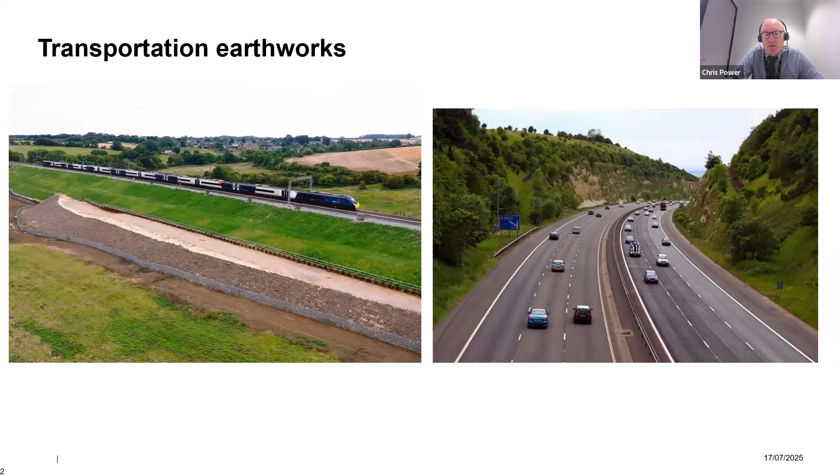And in our part of the world, some of the portfolios of earthworks that we're dealing with are really quite sizable. So I've been mostly working with Network Rail and National Highways and its predecessors for many, many years. If we look at the railway network of Great Britain that Network Rail has responsibility for, it's a network that's nearly 10,000 miles in length. And by the definition of earthworks that Network Rail uses, there's nearly 190,000 earthworks that exist around that network. And I'm sure you can imagine the size of the network and the coverage that it has means that it encompasses a large number of different geological material types.

For National Highways, who have responsibility for the strategic road network of England, a smaller network, 4,400 miles, but a decent number of geotechnical assets that need to be dealt with as well. So nearly 50,000 geotechnical assets that National Highways has responsibility for.

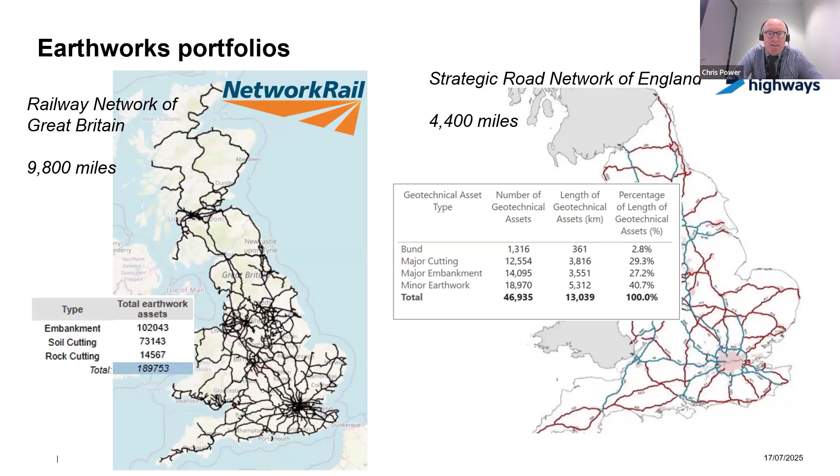And one of the issues that network owners have is that, depending on which owner you are, these earthworks are quite aged. They've been around for quite a considerable number of years.

So this chart here, from a presentation that Tim Spink did in 2019, shows the percentage of network constructed in a given year for both the rail network that Network Rail has and the motorway network of National Highways, and going into HS1 for the link down to the Channel Tunnel. So the main body of earthworks construction on the rail network was in the 1820s to 1860s. So they're pushing 200 years old, some of these earthworks now on the rail network.

Obviously, the motorway network is somewhat younger, built from the late 50s with a main drive through to the 70s and another peak in the 1990s. But even that is starting to show its age now. We're starting to look at things that are pushing 70 years old in some parts of the network.

And the pictures around the outside here show one of the challenges that the age of these networks brings us: the change in the construction techniques applied when they were built. So on the left-hand side, you can see the relatively rudimentary way that earthworks were constructed by the Victorians. Lots of animal and human power to move things around. Embankments were just materials tipped off the edge and self-compacting, or compacted by the weight of horses alone, often.

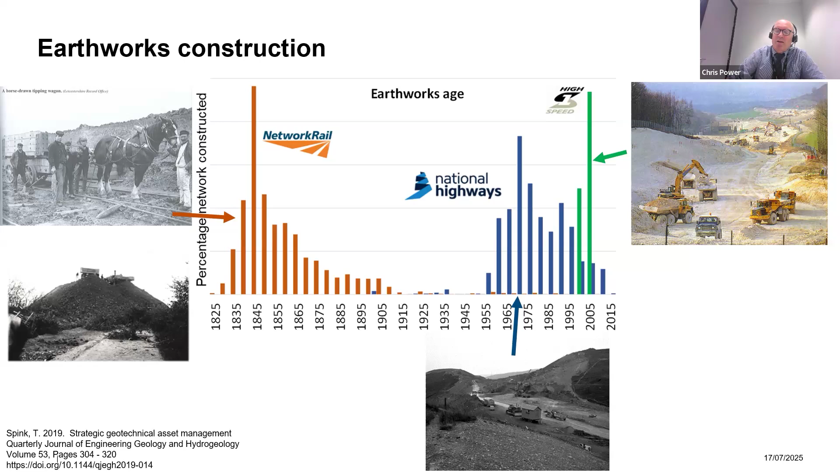But they are aging, and conceptually, one way to look at deterioration is this bathtub type curve, albeit I always find it a bit odd that the bathtub's upside down, but you get the idea. This is from a paper that's been reused and redrawn in multiple ways. In this representation, asset age is your x-axis increasing to the right, and performance of your assets goes from low to high on the left-hand side.

This bathtub will typically show that you have a period of poor performance as an asset beds in, and you definitely can see that in earthworks that are being constructed. You might then have a decent long period of reliable operation, and then as deterioration starts to occur, you can see some degeneration to an unreliable state and potentially even asset failure. And these curves will vary in their shape and gradients depending on all sorts of factors.

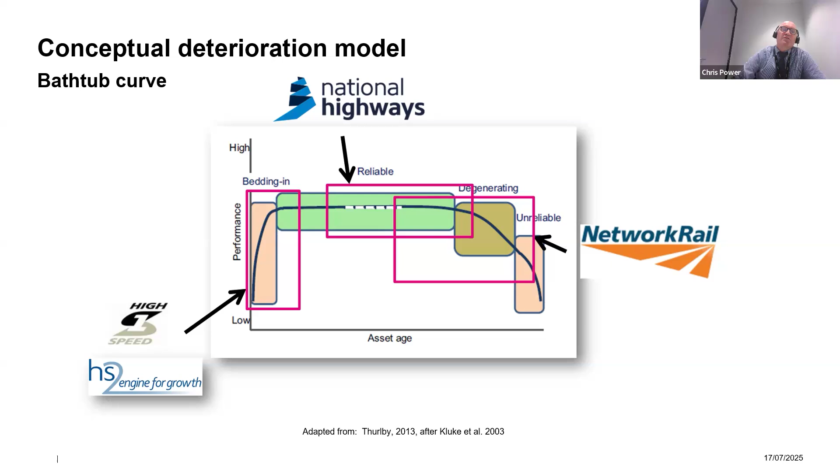But typically, if you were to conceptualize it, perhaps the motorway network that National Highways oversees is in a reliable state and starting to see some degeneration. Network Rail's assets are somewhat older, perhaps seeing more degeneration and unreliability. And new assets will hopefully be at the start of their journey and may bed in, but hopefully should move into a reliable period.

So how does that deterioration manifest itself? There are all sorts of mechanisms by which earthworks can deteriorate, and I've listed a few of them here. When you're building a cutting in natural ground, the water level, perhaps not at the moment, will typically be quite high, perhaps near the ground surface. When you dig a cutting into that, you induce negative pore water pressures. That can take some time to equilibrate, particularly in low permeability materials. That can drive failures, and you can quite often see early life failures due to that mechanism.

Weathering, typically thought of as a geological process over millennia or millions of years, absolutely does happen in engineering time. Observations of clay cuttings that were cut in the 80s and 90s have shown that they are weathering within decadal time.

Wetting and drying of particularly clay materials is an interesting area, and these charts on the right show, when you monitor a slope through wet winters and dry summers, how shrinking and swelling of those slopes can result in horizontal and downslope displacements as they wet and dry through those periods.

There's also erosion of the surface of slopes due to overland water flows. We're starting to see more and more of that happening. Vegetation obviously grows on quite a lot of earthwork slopes. That can have positive impacts, but it can also have negative impacts on how the assets deteriorate.

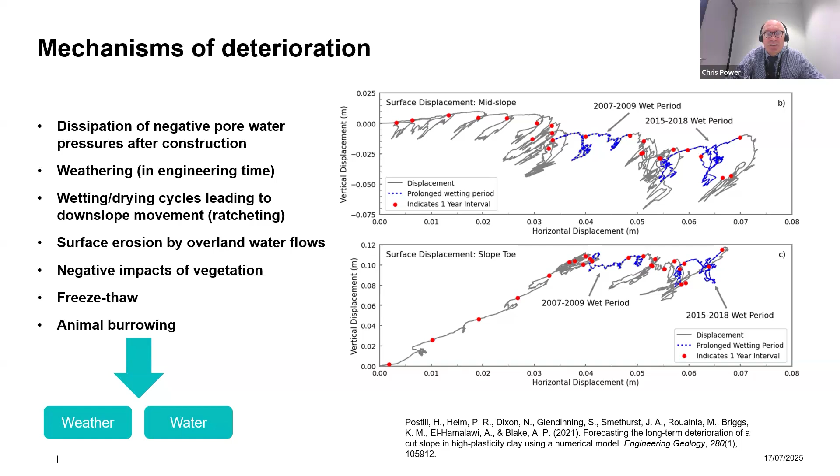One thing that stands out when you think about all of these mechanisms is that quite a number of them will be impacted by the weather. And even more so, it's particularly the water within the weather, so rainfall, snow, etc., and the inverse of when it dries out, that causes quite a lot of these mechanisms of deterioration. And that can then manifest itself in various ways.

Most asset owners will consider that they have either defects or you get past that point to where you start seeing failures. And I could list all sorts of photographs in here, so I've just chosen a few. On the left-hand side, in a rail network, you might start seeing deflection in your rails. You can see a dip in the rail there, where there might be some movement occurring in an earthwork slope. You may start seeing large cracks, as you can see on the bottom left on the motorway network, which may be due to shrinking and swelling of materials. It may be tension cracks due to slopes starting to move down slope.

Typically, asset owners will be looking to inspect their assets to look for those incipient type failures to try and nip them in the bud. But sometimes you can't get there, and it goes to the point where assets fail. And there are many examples across both rail and motorway networks where these failures have occurred. And it can be as dramatic as rails being left dangling in the air, or almost a sort of a delta forming as water's washing out on the bottom left.

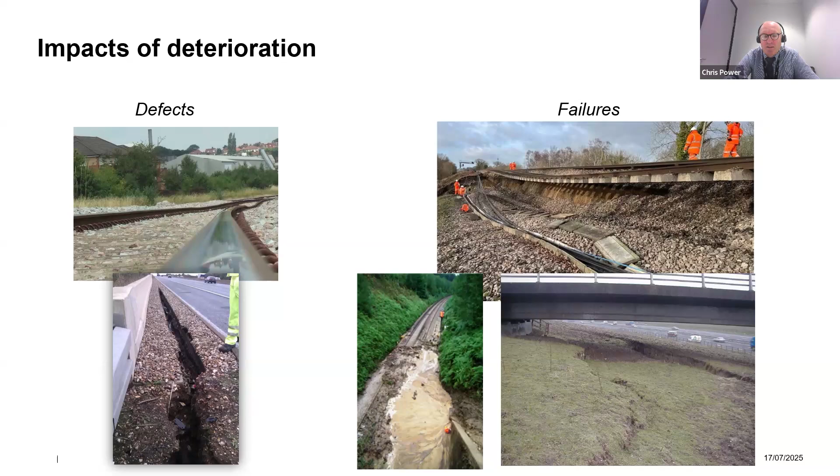Or it could be large slope failures on a cutting, as you can see on the bottom right on the motorway network, which you may think can sort of keep itself within the slope in a cutting example. But in that case, it was starting to push up the hard shoulder of that road at the bottom there. And that road is the M25 in its southern portion. So the impact that that could have had if that had carried on was quite significant.

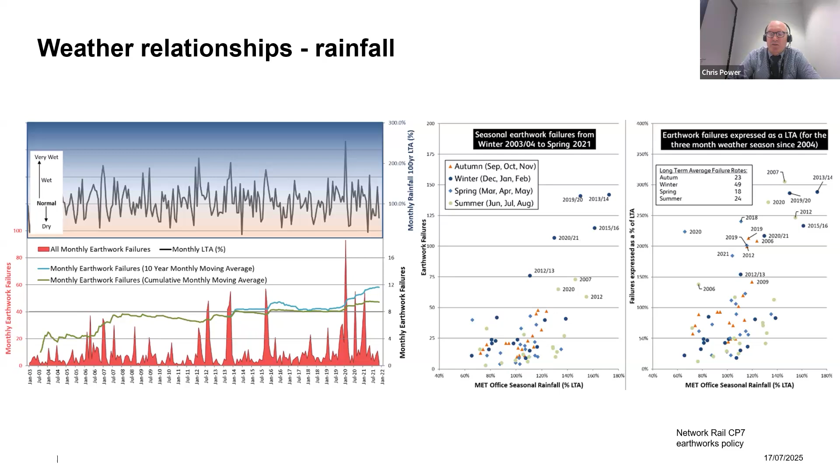So it's not necessarily a valid way, useful as a benchmark and a baseline, but not much better than that. But you can do better. So some excellent work was done as part of a research program called Achilles that ran for a number of years, which really got into the nuts and bolts of modeling how changing weather into a model can drive deterioration that we see in assets.

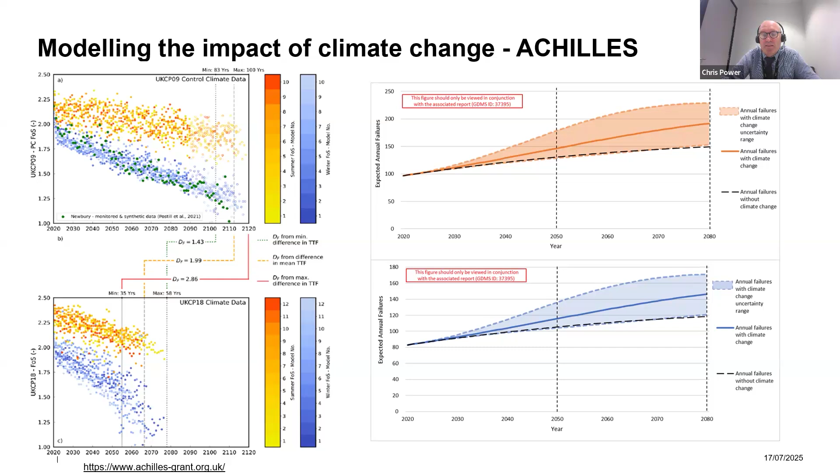So some work was being done by National Highways to take those results and push that into the deterioration model to give some kind of accelerated climate change projections in those blue and orange bands over the baseline climate prediction, where we can start seeing more expected annual failures due to this type of deterioration methodologies.

Work's also been done as part of Achilles to look at what might be the impact of future climate for new slopes. So this was looking at slopes in an intermediate plasticity clay material, such as the Mercia mudstone. And on the left-hand side is taking the typical types of slope angles that we would cut our slopes in. So 1 in 2.5 at the top, 1 in 3 in the middle, and 1 in 3.5 at the bottom for slopes in different heights.

And typically, earthworks designers would be asked to design for a 120-year design life. And you could say that if climate carried on as it was for now, you might expect that with these typical earthwork slope angles, we might get that 120 years. But if you start modeling plausible future climate change, we start seeing that these slopes that we're quite comfortable designing at the moment might not make it out to that 120 years, maybe failing before that.

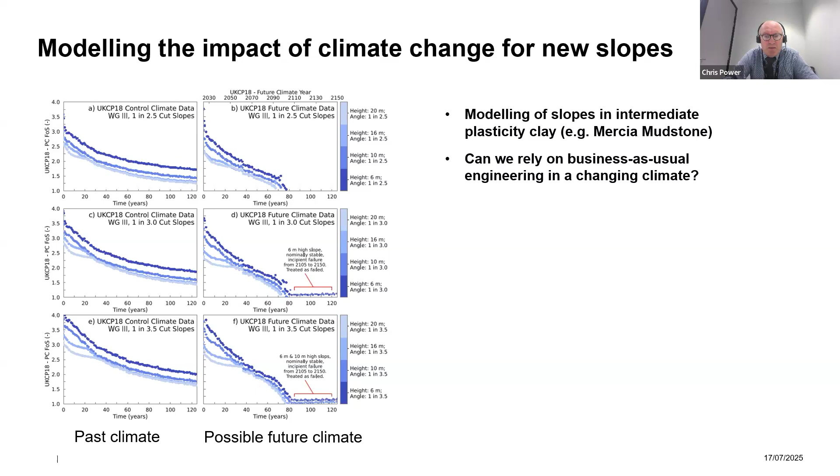We also need to think about more than just failure. Shrinking and swelling of clay slopes is an important area, and National Highways already deal with this, have already got hazard ratings for their network held in their GDMS system, based on some of the products that the British Geological Survey produce.

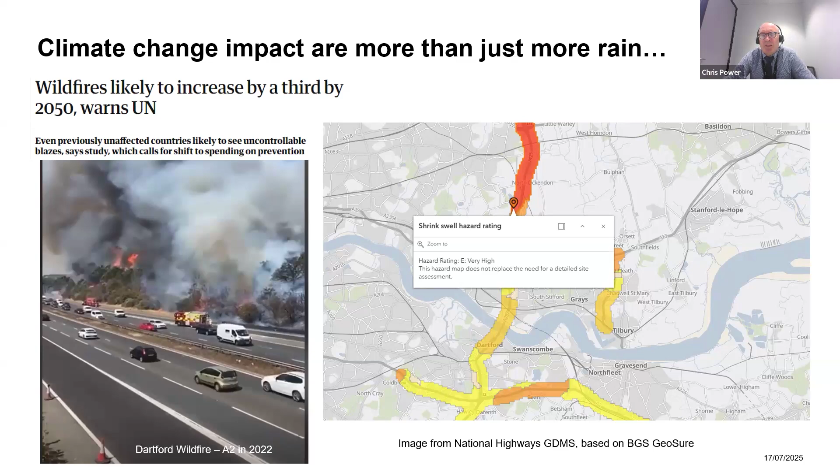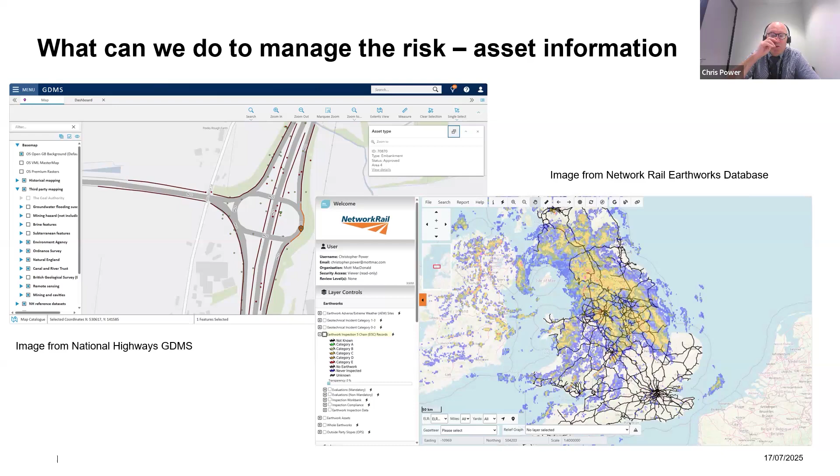And going back to GDMS and asset systems, one of the things that we can do to manage risks is to actually understand our assets and understand the condition state that they're in. We're very, very fortunate in our neck of the world to have two absolute exemplar systems for holding that asset information. I genuinely think that these are the best in the world. So National Highways has Geotechnical and Drainage Management Service, which has been holding information on their assets for over 20 years. And Network Rail have an earthworks database, which holds similar information and is very advanced in even bringing in weather forecast information so that the management of earthworks can be included within that.

We also need to break out of the silos that we work in. We need to stop thinking about us working just on earthworks, just on structures, just on track or pavement. We need to recognize that there are interrelationships between assets, and particularly for earthworks, drainage and the management of water is a key thing where we need to be breaking down these silos more and more.

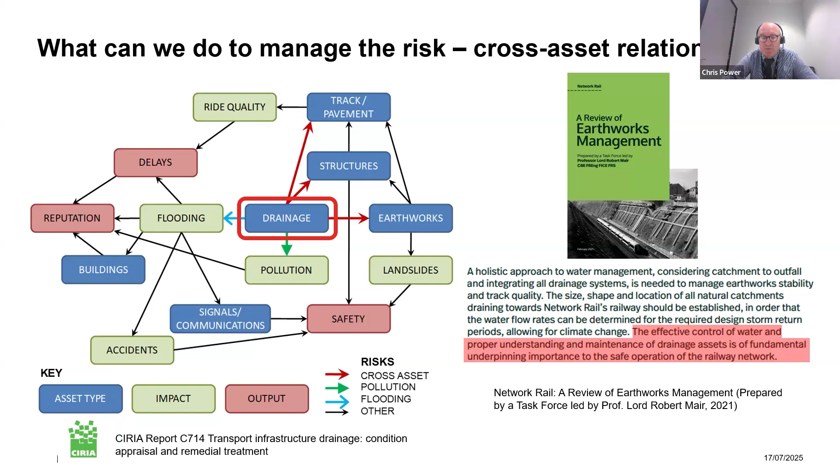And that was recognized in the report that was done by Professor Lord Mair after the Carmont tragedy in 2020, which very clearly recognizes that the effective control of water and understanding of the maintenance of drainage assets is absolutely fundamental to understanding how we operate a safe railway network, and the same could apply to any kind of transportation network.

We also need to more and more make use of technology. It's getting harder and harder to inspect assets physically. It's a potentially dangerous environment. We want to keep people away from those slopes as much as we possibly can. So more and more asset owners are looking at ways of observing their assets without having to physically go and see them. That might mean, for example, on the left, Network Rail are deploying slope monitoring all over their slopes around the country. These are examples from Scotland.

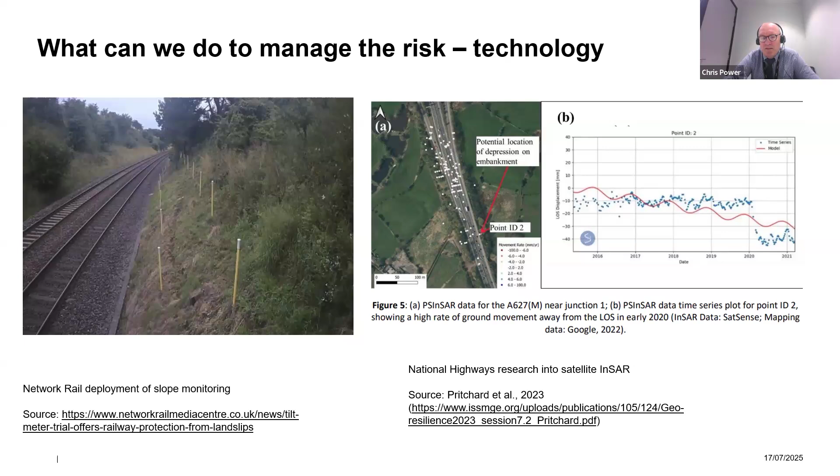And various people are looking at things like satellite InSAR to look for movements of their slopes from space. And that brings its challenges because that generates huge amounts of data for which different ways of consuming and making information out of that data will need to be looked at. But it's definitely an area that we're going to be more and more taking advantage of.

And the final slide that I've got really is thinking about, well, ultimately, what can we do to our earthworks in a changing climate? And one of the issues that we have around changing climate is that there's uncertainty in the way that the climate will change, and we can deal with that insofar as we can. But there really is very, very little science around how that changing climate will actually impact on earthworks. The ACHILLES project really stands out as being one example of where we've got some decent science. But in any of the other ways that climate might impact on earthworks, we really are very much in an engineering judgment space at the moment, and more work needs to be done.

But one thing that we can be doing is thinking about when we build assets or we intervene on assets is just make them adaptable. So take the concepts of adaptation pathways and build assets such as this one in a really good paper from Thompson John that was built on the A40 in the Brecon Beacons. Build assets that we can get to. If we need to clean the drains and keep the drains working, we can get to those drains really easily. If we need to make ditches bigger, we can at least get at the assets so that we can adapt them into the future. So we're going to need to have some of that adaptability in the way that we do things going forward into the future.

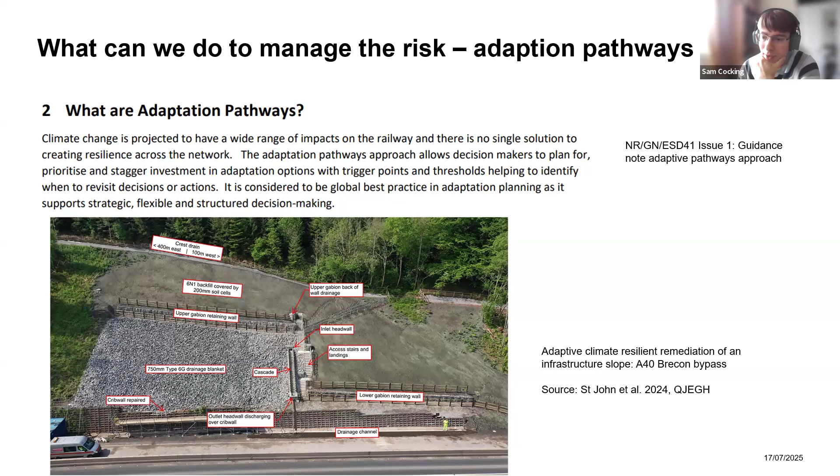That's good. We've got another question in the chat from M. Pandy who asks, are you using non-homogeneous Markov chains to account for non-stationary effects of climate change? Yes. I can answer that one quite quickly. Yeah, it's a non-homogeneous Markov chain modeling method that we use. Great.

Any other question? Oh, Pete's got his hand up. Pete, do you want to ask? Hey Chris, it was just sort of a comment/question about vegetation, really. It's a difficult one, isn't it? Because it can be both beneficial and negative. It can sort of accelerate shrink swell, but at the same time improve slope stability.

Do you think we as engineers get enough or even any training to sort of try and understand vegetation and how it's best dealt with in a sort of engineering context? Because I'm not sure I've ever really had any. It's sort of all stuff I've learned accidentally while doing other things. I wondered if you had any views on that.

Yeah, that's a really good question, Pete. And thanks. It's worth pointing out that I've used a number of your charts in the things that I've done here, and it's been absolutely pivotal to a lot of the work that we've done. But you're absolutely right, Pete. So Network Rail have got an earthwork management of vegetation on earthwork slopes standard within their module. So there's definitely a start in the way that things are done there.

But I would say if I was looking at a typical design project where people are thinking about the planting of vegetation on new assets that have been built, it is not geotechnical stability thoughts that are at the forefront of people's mind when that's done. It's about maintainability, it's about landscaping, it's about aesthetic views of things. If you look at the way that sometimes Network Rail can manage its vegetation, it will be about leaf fall onto the track, which is absolutely important.

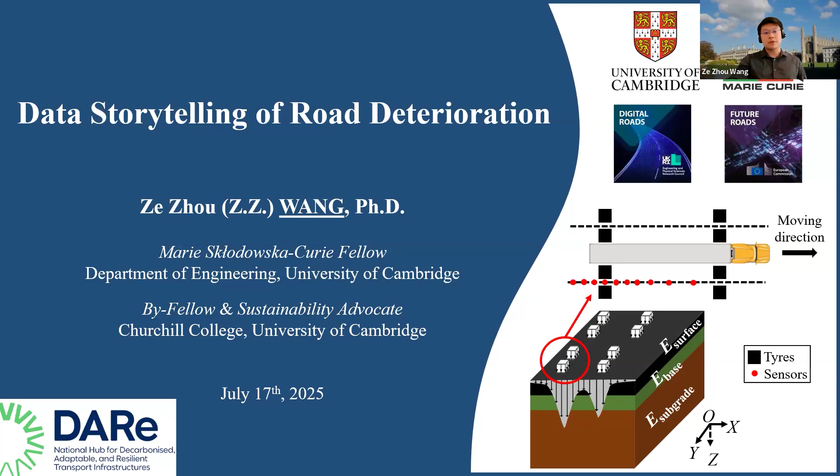So today I'm just going to share a little about my research, my fellowship on the topic of data storytelling of road deterioration. We all know that road infrastructure is very important, responsible for the transportation of goods and people. And if something undesirable happens to road infrastructure, the consequence can be quite significant.

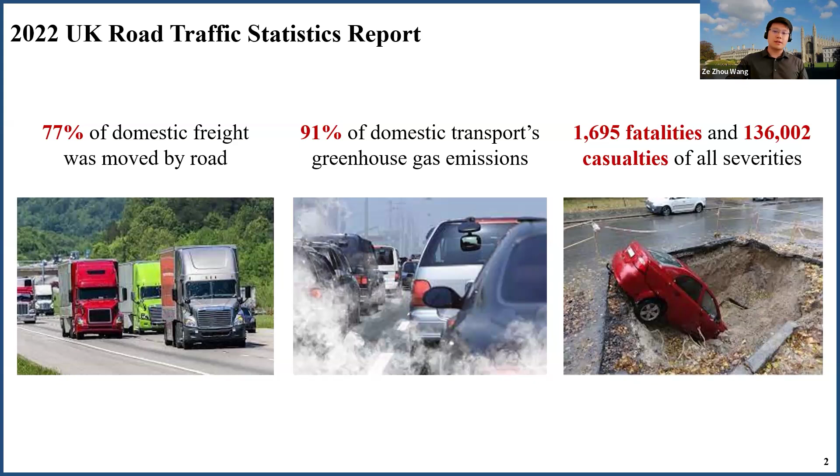So this has really led to the Cambridge Digital Roads of the Future project. This project supports two big grants, Digital Roads and Future Roads, which are jointly sponsored by EPSRC, the Marie Curie Council, Costain, National Highways, and multiple other industry partners in the UK. This whole program housed more than 50 researchers, and I'm one of them, working on a very specific aspect of the overall road infrastructure in the UK.

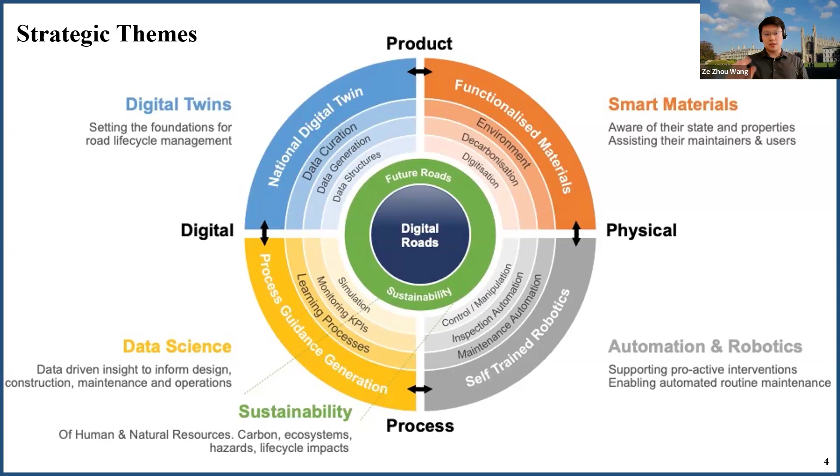So this particular project actually consists of multiple themes that range from digital twins, data science, automation, and robotics, and smart materials, and all centers on the very topic of sustainability. So my research in this plan is really at the intersection of smart materials and data science. So I'm actually working on two themes in this very big research project.

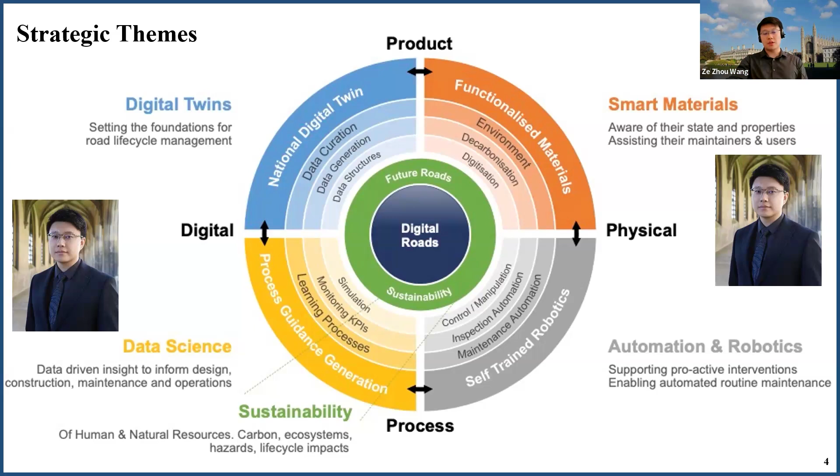So I guess my presentation is a little bit academic. So I start with really presenting my research vision, which I try to summarize in one single sentence. It's knowledge-guided data storytelling for understanding our roads. So essentially, my approach consists of three different components.

And the first component is about data-driven analysis, where I collected national scale data and designed data-driven approaches to forecast pavement or the road's performance. Based on historical performance data, or the traffic or the climate or the environment factors, I can then leverage machine learning to really draw insights and learn from

all these historical data. And based on these understandings, the machine learning model can really forecast the future road or pavement performance, whether it's about cracks or a general performance indicator like the International Roughness Index or the rutting depths.

But given the criticism of data-driven analysis for being a black box and lacking physics-based knowledge, the second component of my research really taps into the numerical simulation model to capture the physics-based relationship between the material properties or the material behavior and the overall response of the pavement system under the real traffic dynamic loading.

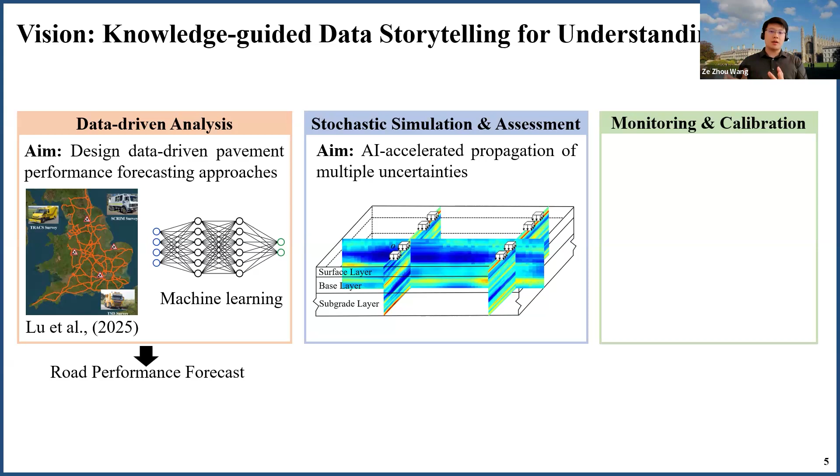But at the same time, in order to capture the real in-situ behavior, I also tap into the monitoring techniques. And specifically, I focus on this comparatively new technology, compared to the falling weight deflectometer. This traffic speed deflectometer is the main monitoring technique that I focus on in my research.

So if you really combine the simulation and the monitoring component in a model calibration framework, it is actually possible to calibrate the model in a way that the model outputs really match what has been measured by the traffic speed deflectometer. And in that sense, the calibrated model can act as a digital twin, if you want to put it in a more fancy term, a digital twin framework.

And then we can use the calibrated model to simulate the pavement response under various loading conditions. And this then allows us to understand what's going to happen in the future for the specific road of our interest. So in this case, I can obtain the road performance forecast from two different angles, one from the data perspective and another from the sensor monitoring perspective.

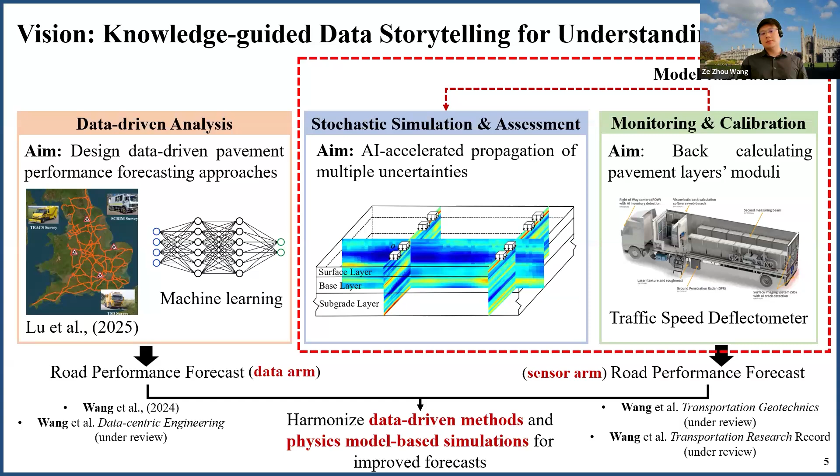And of course, the ultimate goal and what I am currently working on is to harmonize these two components, to put them together to formulate what I call the knowledge-guided data storytelling for really understanding our roads. So today I'm just going to talk a little bit about the model calibration component.

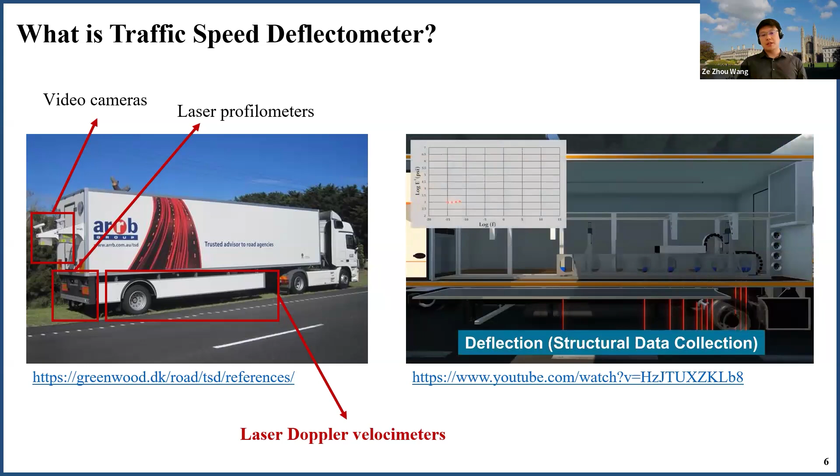So first of all, the traffic speed deflectometer is, as I say, a comparatively new technology compared to the falling weight deflectometer. Essentially, it is just a measuring truck equipped with a number of sensors. For example, this is a laser Doppler velocimeter that measures the pavement deformation or response as the measuring truck is moving at traffic speed. That's why it's called traffic speed deflectometer.

So the actual monitoring data we can get from the TSD device corresponds to the pavement deformation, right? If you take the first derivative of the deformation, we get the deflection slope.

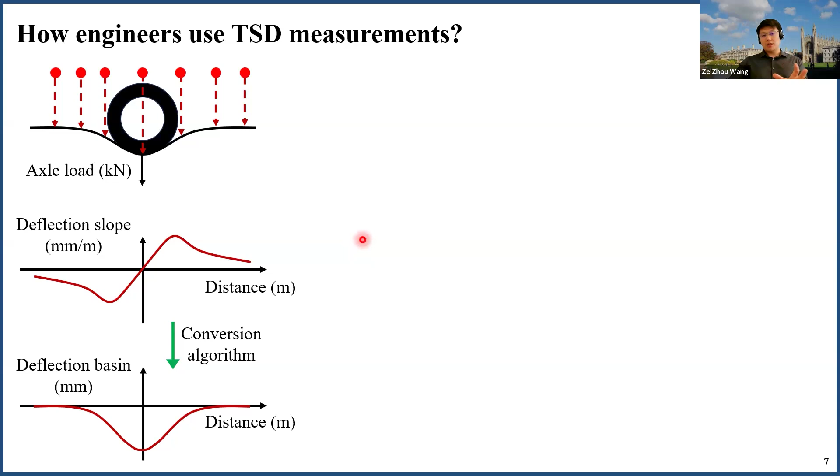But regardless of the type of data, a very common way of using the data is to couple it with a physics-based simulation model, numerical model, or in the simplest sense, an empirical model that describes the relationship between pavement response and the material properties, in a back calculation framework. And in this way, we can back calculate the material properties.

For example, the modulus of the three different layers in the standard pavement system, right? So this value can then be considered as the in-situ value of the material properties, which can then be used to carry out quite a lot of downstream tasks for understanding the pavement response for future scenarios.

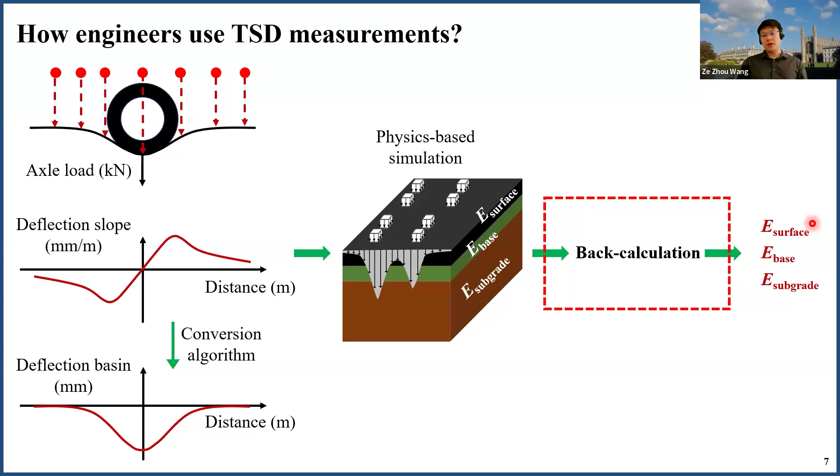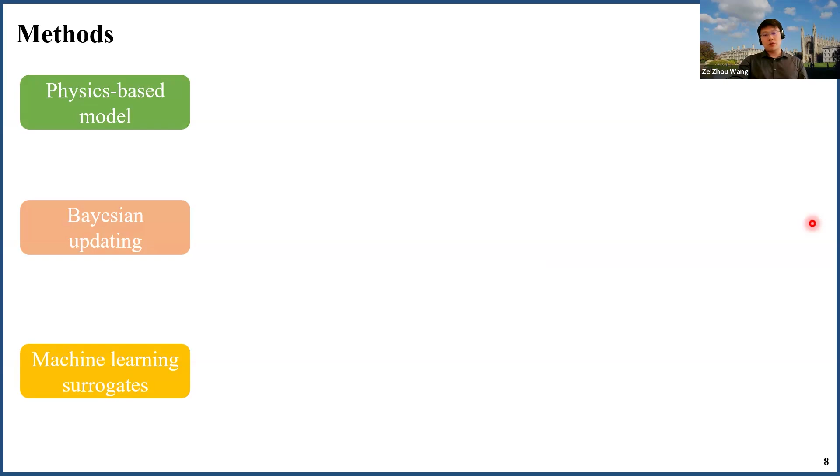So my work really focused on developing techniques to better interpret the TSD data in the overall framework of back calculation. So for the back calculation, we actually need the collective efforts from a number of components. And first of all, it's a physics-based model. We need a high fidelity model that really captures the physics relationship between the material properties and the actual pavement response under the external loading conditions.

So in this particular case, we use this PaveMove developed in-house to really simulate the pavement deformation under the TSD dynamic loading. So with this high fidelity simulation model, I then use Bayesian updating as the technique to calibrate the simulation model based on whatever measurement data collected on site. And the advantage of Bayesian updating is that it transforms the conventional deterministic back calculation framework into a probabilistic context, which then allows us to explicitly consider a number of uncertainties in the system, say measurement uncertainties, or even the uncertainty that exists in the material properties.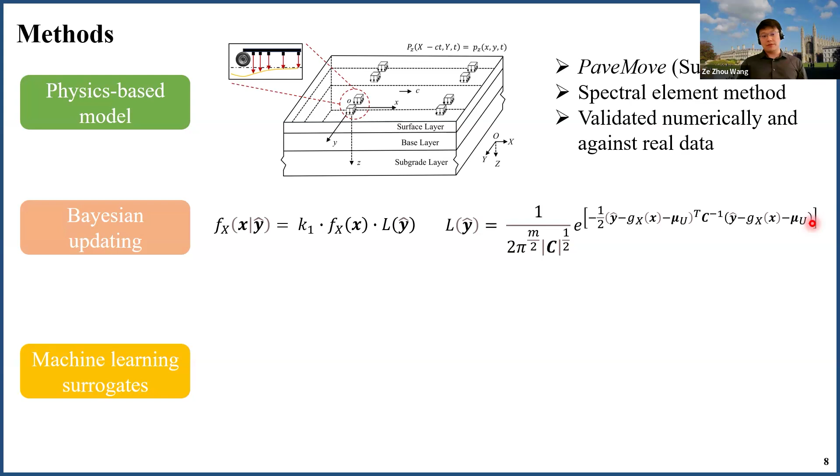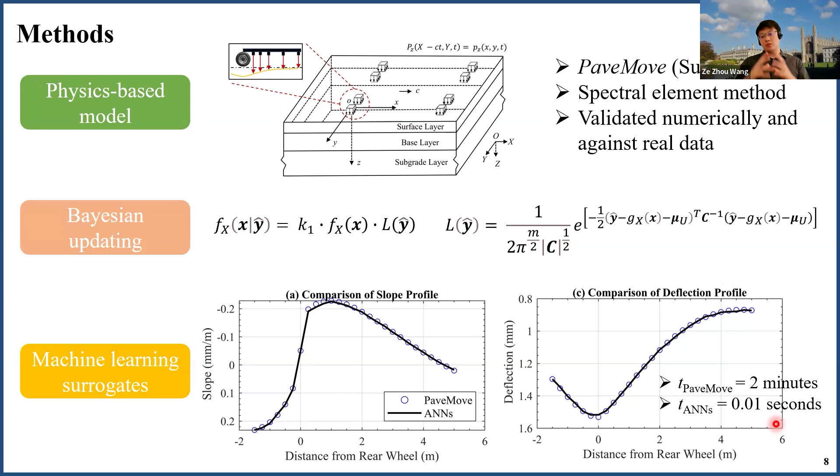However, in order to transform this back calculation exercise into real-time or near real-time that aligns with the data collection nature of the TSD device, machine learning is a good tool that can accelerate the whole back calculation. So in this case, I've developed machine learning surrogates to capture the high fidelity simulation from the original physics-based model, and at the same time reduce the computational resources that we need. As you can see from here, from 2 minutes per simulation to about 0.01 second per simulation. So these three components collectively carry out this back calculation framework to interpret the TSD data for us to really understand the individual material properties.

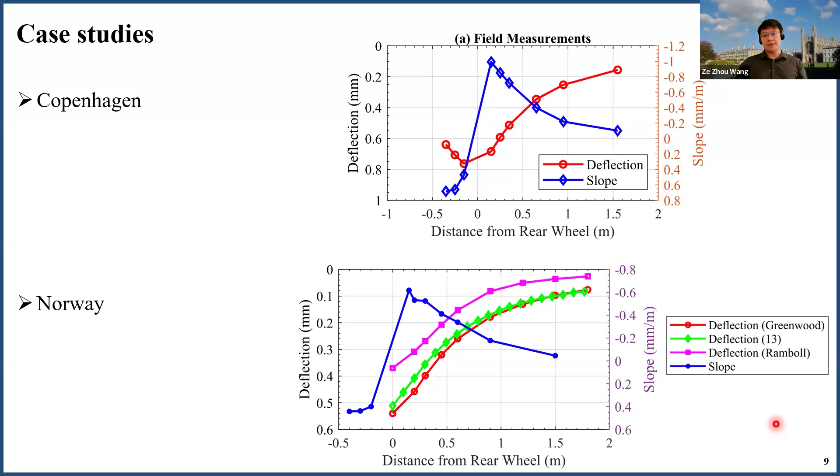So I've tried to test this whole framework using some real data. Unfortunately, this is not data from the UK, but these are two very classic case studies that people use to test whatever framework or techniques developed for interpreting TSD measurement data. One in Denmark, one in Norway. So I try to compare my solutions with two others. To make it simple, I just call it basic version and advanced version. And this is what my approach will provide.

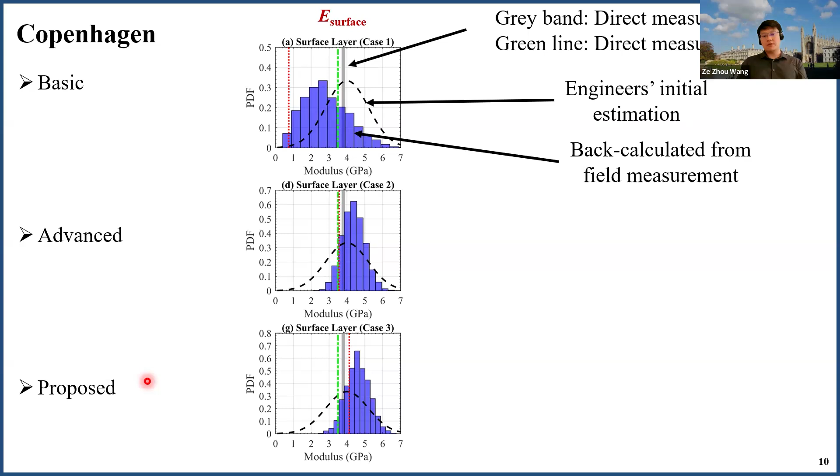So probably you can tell from this, from the dual perspective of accuracy and uncertainty quantification, my solution provides a much narrower histogram representing improved uncertainty quantification compared to the very basic version of this back calculation framework, right? Also, in terms of accuracy, I see a reasonable agreement between the results I obtained and the reference results provided in this particular case study.

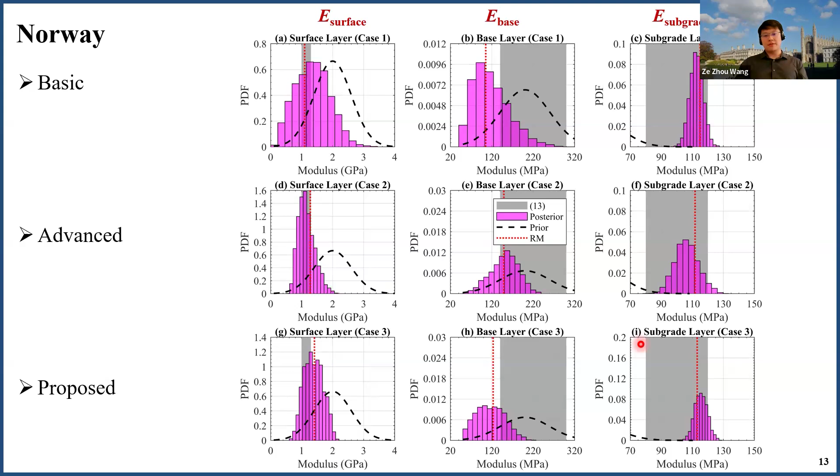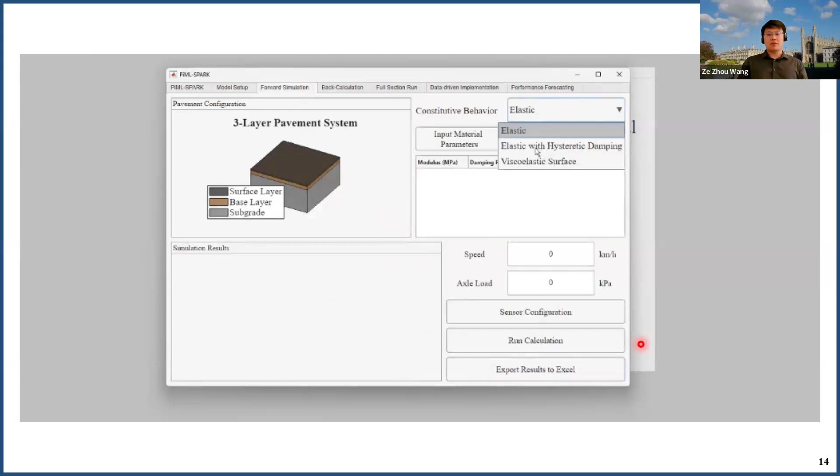So what I really want to highlight is that to really benefit the industry, I'm now developing a standalone user interface for the algorithms or framework I develop in my research, so that industry can directly use this software to interpret TSD data.

So I provide the user with a number of functions to choose different material constitutive models, to input parameters, and most importantly, I offer the flexibility to configure different sensor locations, because for the TSD device, different companies may have different specifications. So I give the user the flexibility to define the number of sensors and the location of these sensors, so that the analysis can be based on this particular sensor configuration, right?

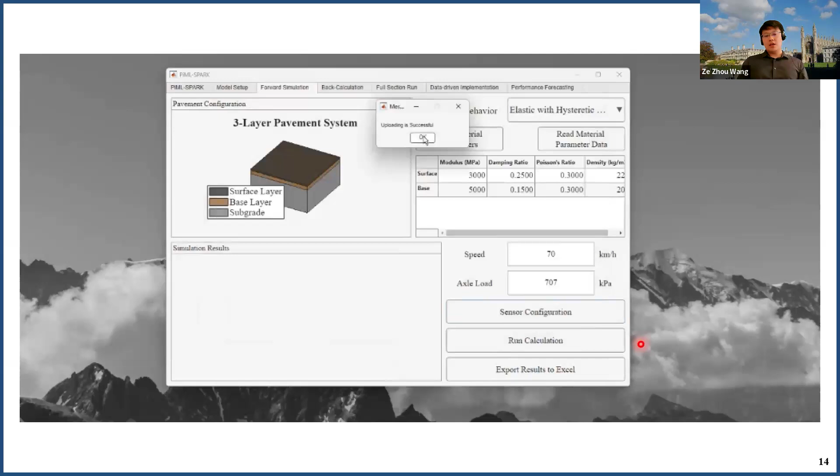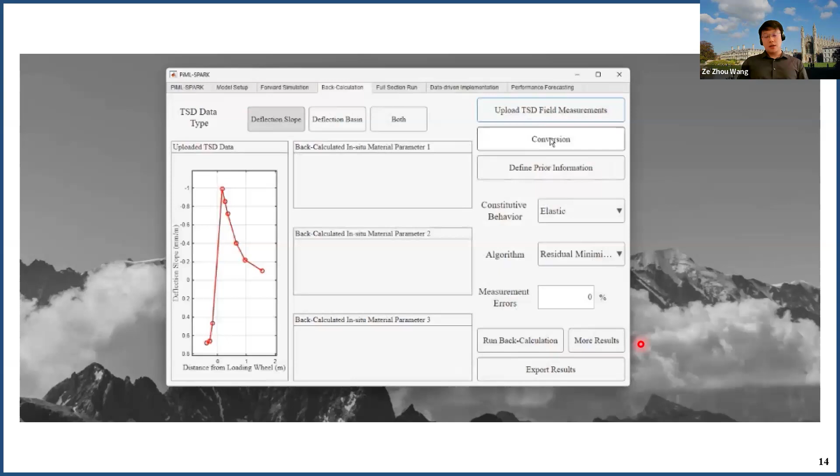So the machine learning model based on the high fidelity simulation model has been pre-programmed into the software, which allows us to really generate or understand the pavement deformation. As it comes to the back calculation, users can upload the TSD data from an Excel spreadsheet, and I also provide certain algorithms, exactly the ones that I try to advocate to improve how we interpret TSD data for understanding the in-situ pavement material properties.

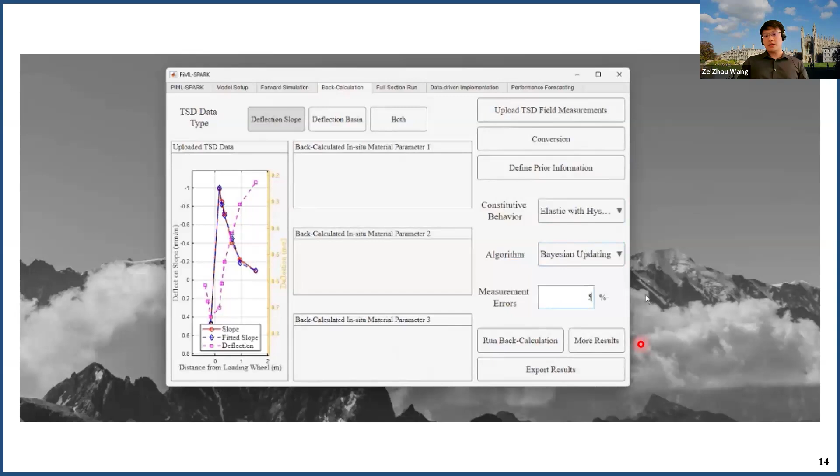In this way, engineers can also incorporate their initial engineering estimation to facilitate the back calculation and choose between the conventional deterministic or probabilistic approach with some inputs on the uncertainty that exists in the systems. Then the software can automatically sample the posterior distribution of the material properties based on whatever measurement data we upload to the system. And the user can also monitor this whole process to evaluate whether the results

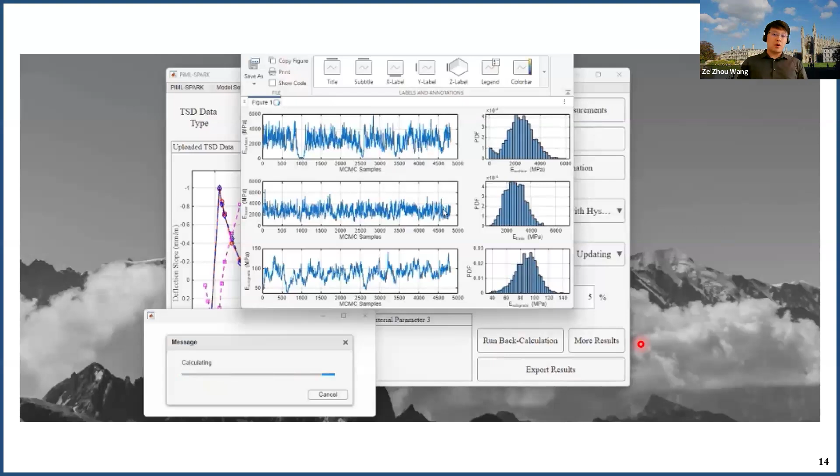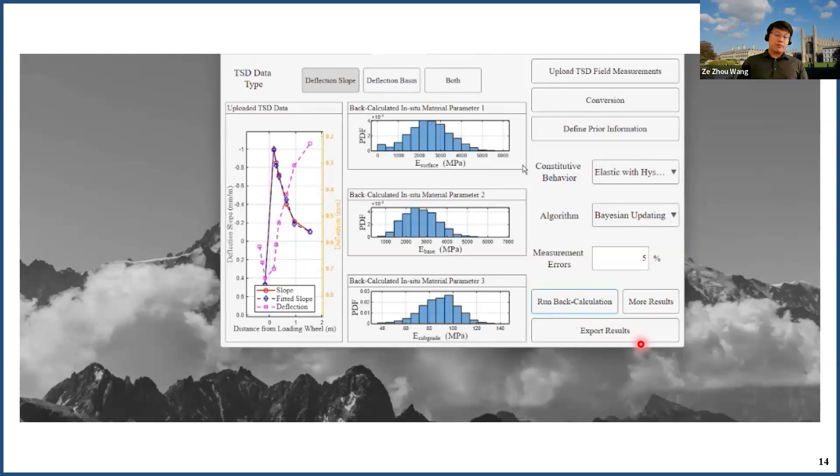are valid. So in this case, we can sample a probabilistic distribution of the material properties, which gives us additional information other than the mean or average behavior, but also the standard deviation or the uncertainty information. So this is what I have developed so far. The work is still ongoing. It will certainly include additional features and functions based on the outputs of my research.

So the eventual way is to combine the two arms. Conventionally, I've implemented the conventional machine learning strategy to consider input data related to traffic, environment, and historical performance data. Through machine learning, we can provide a forecast of road performance, say crack length, rutting depth, or international roughness index, into the future conditions.

But again, people have been criticizing pure data-driven analysis for being a black box, and this presents the opportunity to incorporate the second arm of my work on understanding the in-situ material properties, using the simulation model as well as in-situ measurement data to provide additional physics-based knowledge, so that the second arm can regularize and help the pure data arm to eventually, hopefully, improve the overall forecast of pavement performance. This will allow us to establish a deterioration mapping that represents different rates of deterioration, at least at the regional scale.

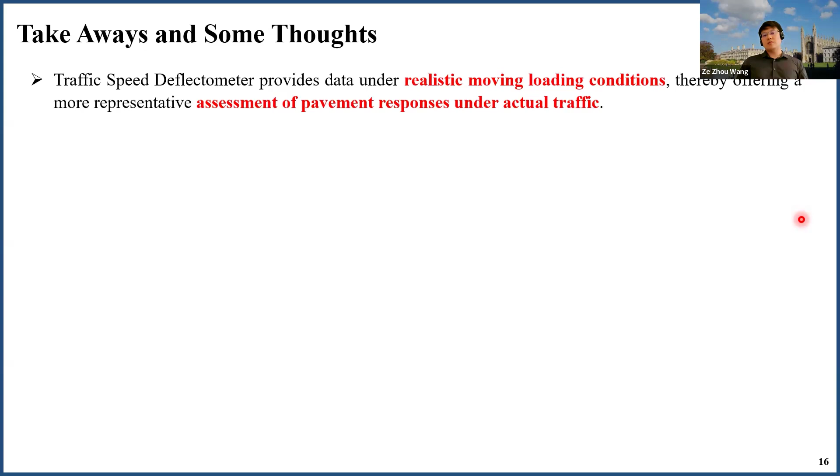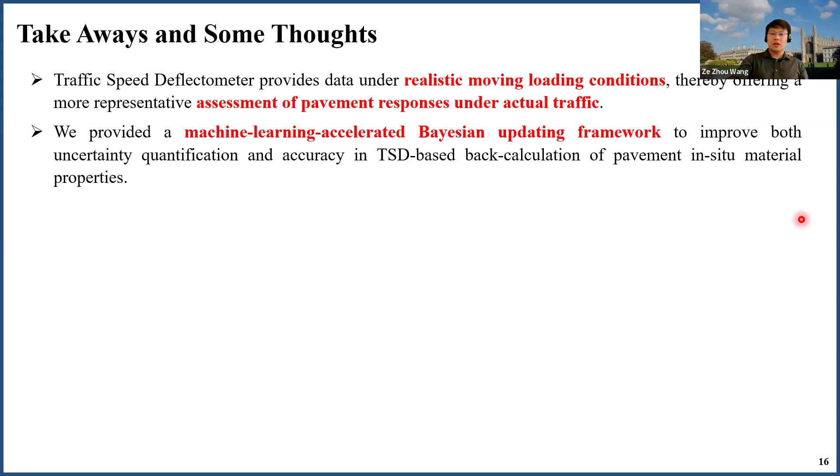So the takeaway is that TSD is a pretty promising technique that can capture the response of roads under realistic moving loading conditions. I provided a machine learning accelerated Bayesian updating framework to improve how we interpret TSD data from both the accuracy and uncertainty quantification perspectives. I'm advocating for this probabilistic approach over the conventional residual minimization approach in interpreting TSD data for understanding road performance.

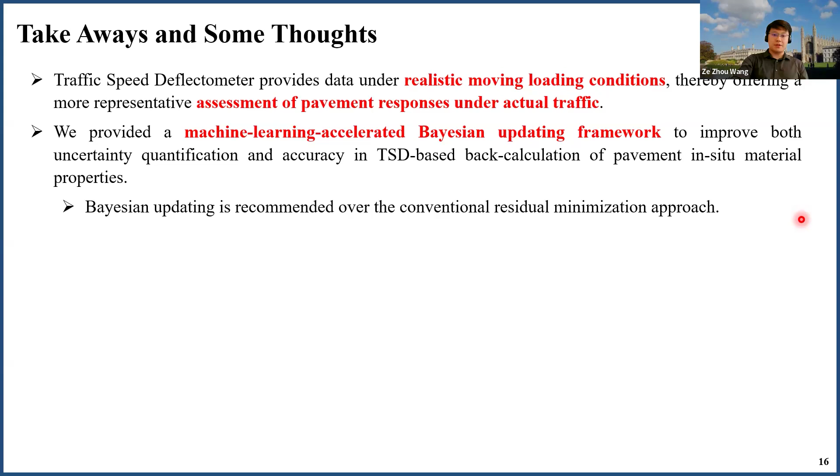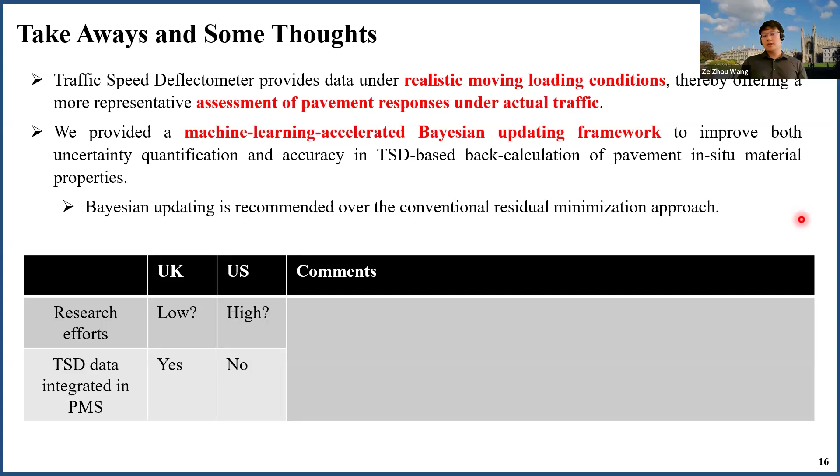Lastly, I want to provide some thoughts from going to conferences and talking to people. On this topic of TSD, I see a significant amount of research going on in the US compared to the UK. But what is quite interesting is that TSD data has already been integrated into the pavement management system in the UK, whereas in the US, even though there is a lot of research, I may be wrong, but many of my friends in the US told me TSD data has not really been integrated into US PMS systems.

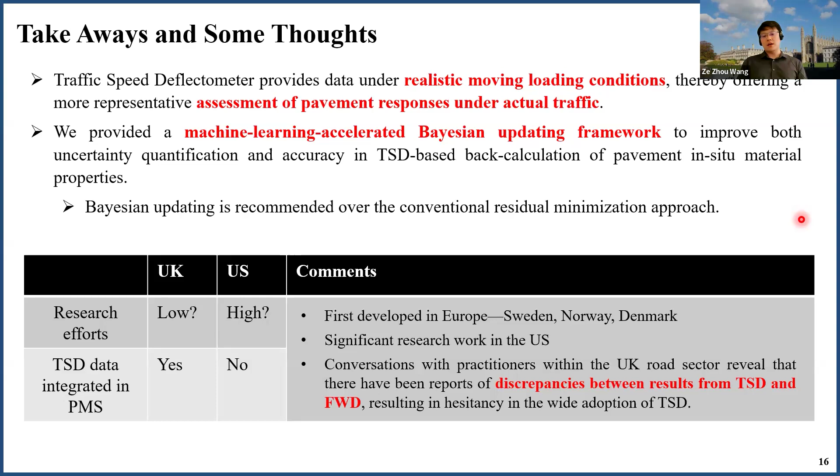TSD was first developed in Europe, in Sweden, Norway, and Denmark, and now I see significant research work in the US. I have also tried to communicate with industry to see why TSD is not widely adopted in the UK, and there have been some reports of discrepancies between the interpretation results of TSD and the conventional falling weight deflectometer. But I'm confident that by providing advanced interpretation techniques like the Bayesian framework, we're able to provide improved interpretation results using TSD data, which I think paves the way for its wide adoption, at least in the UK.